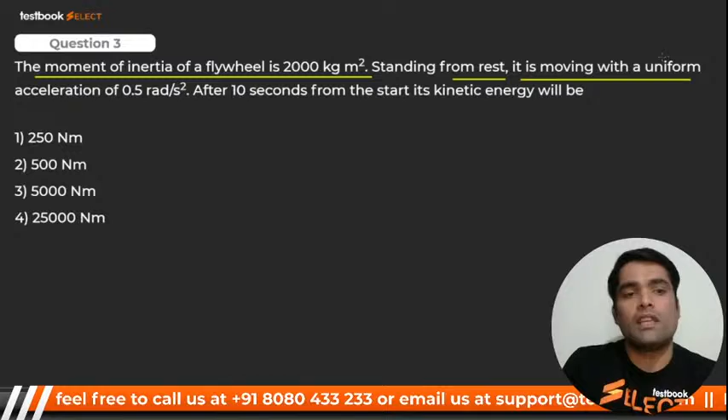The moment of inertia of flywheel is 2000 kg meter square, standing from rest, so U equals 0. It is moving with a uniform acceleration of 0.5 rad per second square after 10 seconds. From the start, its kinetic energy will be - so omega 1 will be what? Omega 1 is 0, yes it is at start, omega 1 is 0.

Omega 2 will be what? It should be omega 1 plus alpha into t. Omega 2 equals omega 1 plus alpha into t. You know omega 1 is 0. Alpha is 0.5 multiplied by 10, it should be 5. So what is kinetic energy? It should be none other than half of I omega 2 square, right? Calculate the answer, and the answer will be...

2500... 25000 Newton meter. I hope you got it. Had you got it? Very good. 25000, I repeat it's 25000. It's 25000, here we go for next.

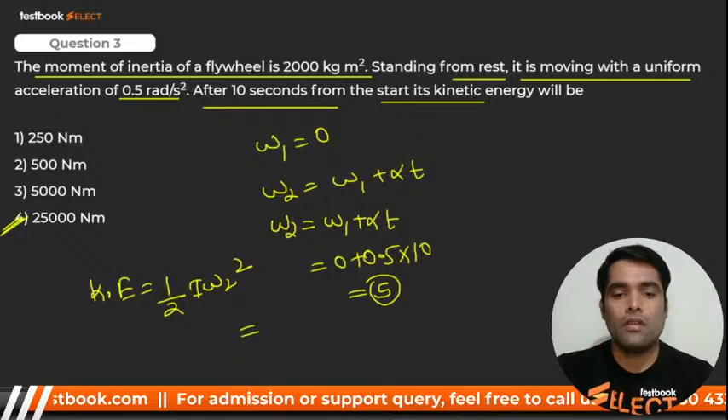This is the next question: a semi-infinite flat plate with an elliptical hole is subjected to tensile force as shown in figure. If A by B equals 2, then the stress concentration factor KT - what should be the KT? What is the formula for calculating it? Yes, it should be none other than KT equals 1 plus 2 into A by B. A by B is given, so KT will be equal to 1 plus 2 into 2, it should be 5. Very good, 5. Here we go for next.

U infinity is free stream velocity, U is velocity at Y, and delta is boundary layer thickness. Then for the boundary layer flow, the momentum thickness theta is given by - can you tell me? It is none other than integral 0 to delta of U by U infinity, in bracket 1 minus U by U infinity, so it should be none other than number 1. Very good, number one, very good.

Here we go for next. K is thermal conductivity, H is heat transfer coefficient. Then the critical radius of insulation for a cylinder is K by H, and for sphere it should be twice K by H. So it should be K by H, that is number 1. Okay, here we go for next.

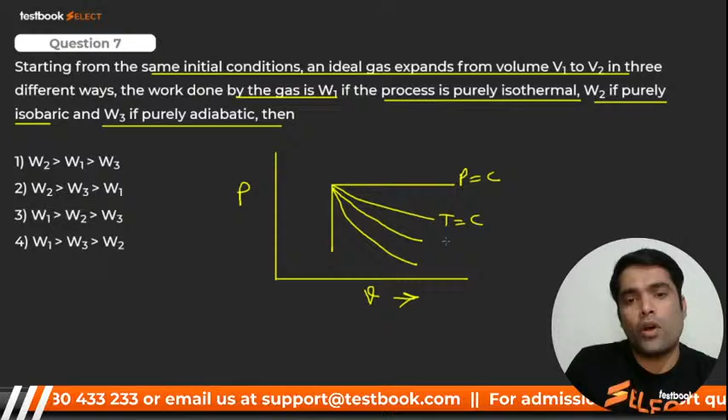The work done by the gas is W1 if the process is purely isothermal, W2 is purely isobaric, and W3 is purely adiabatic. You have seen for expansion - isothermal, polytropic, adiabatic, right? So the area under the curve which is the most, that is nothing but constant pressure, it is isothermal. And it is polytropic, and PV raised to power gamma equals C, that is adiabatic.

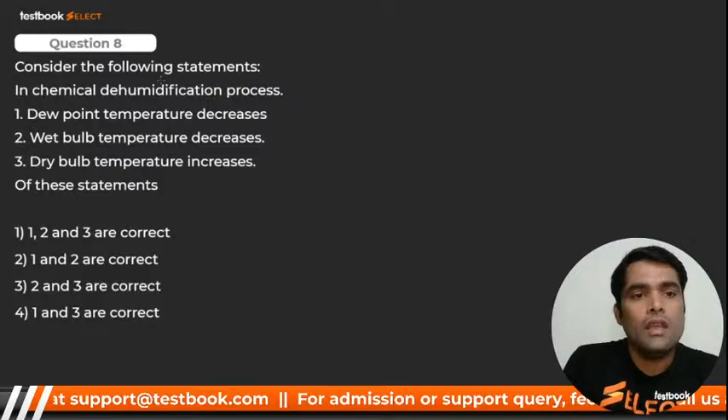Consider the following statement: in chemical dehumidification process, dew point temperature decreases; in chemical dehumidification, chemical dehumidification means this one, right? So dew point temperature is definitely decreasing, no issue. Wet bulb temperature decrease? No, wet bulb temperature remains constant. Dry bulb temperature increase, correct. So statement 3 is correct, but 2 is wrong. So definitely 1 and 3 are correct. Number 4 is correct.

Let me check your answer. Very good, 4, 1 and 3. Here we go for next.

A particle has straight line motion as per this equation. x is in meter, t is in second. After 2 seconds from start, what is the acceleration? dx by dt will be v, and the next derivative will be acceleration. So first we find dv. That means I have to find out 2 times derivative of this x. So it should be 3t squared

minus 4t, right? And next time it should be 6t minus 4, right? And after 2 seconds, so it should be 12 minus 4, that is 8.

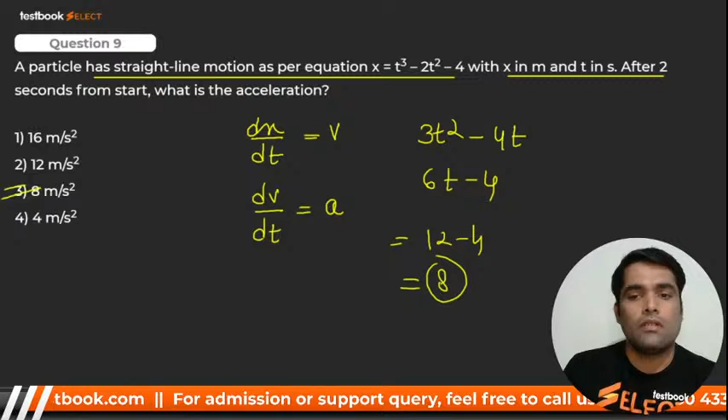8, very good, I have solved it now. Why worried? I have solved it. Okay, here we go for next.

The aim of just-in-time manufacturing is to reduce lead time, yes; improve customer satisfaction, of course; increase productivity, yes. So all of the above are correct. Very good, can we go for next?

Here we go for next. Okay, in a blanking operation.

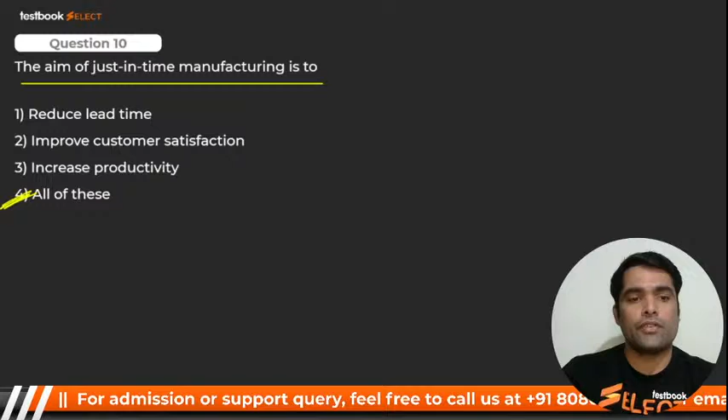In a blanking and piercing operation, clearance between die and punch depends on what? Clearance kiske beech depend karega? It depends on the sheet thickness, thickness of sheet material, right? Very good, thickness of sheet material. Very good, question number 11.

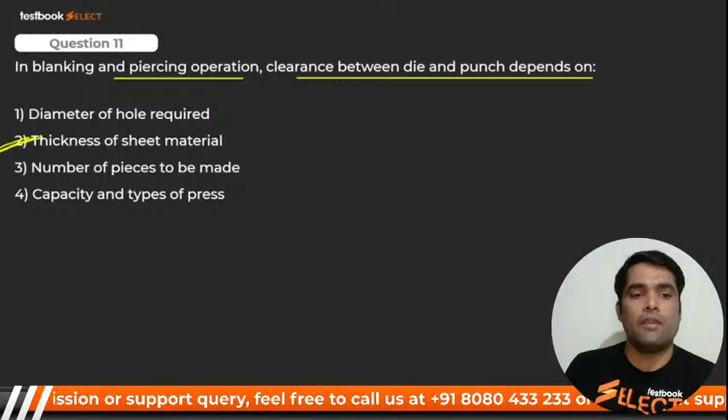Here we go for next. Sheet thickness, very good. For a helical spring, spring index is nothing but mean dia to wire dia - mean coil diameter to wire diameter, right? Number 3. It's an informative question, you should know, my dear. Perfect, mean coil dia to wire dia.

Sensitivity of governor is nothing but W range divided by W mean, yes or no? And W range will be N1 minus N2 upon N mean, right? So N1 minus N2, where it is number 1. Can we go ahead? Chalein aage. Here we go.

Question 14: which of the following bearing is preferred for oscillating condition? For oscillating purpose, we need needle roller bearing. Which one? Needle roller bearing, very good. Everybody is very good.

Oh yes, OBC, there is a chance. Education Hub signing, I have seen your query. There is a chance, yes, you will definitely. There is a good chance.

In finding Reynolds number, the characteristic length of a circular pipe of dia D is taken as, my dear, please tell me. It is none other than rho V D. Actually, D hi lenge. Kya lenge isme? D lenge. Square hai to square ki side le lenge. But my dear, if it is supposed to be

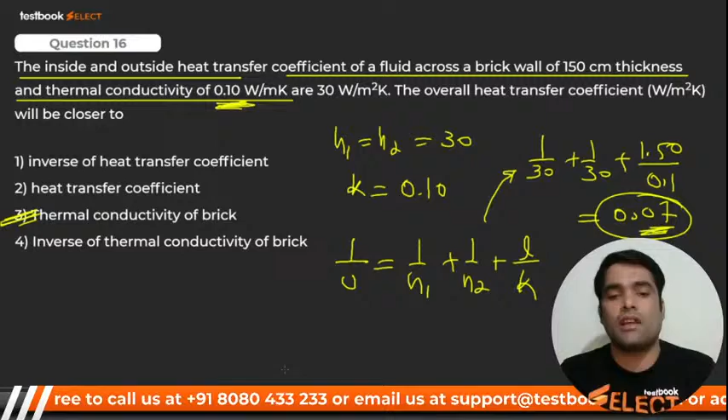0.07, and this is almost equal to the thermal conductivity, which is 0.10. So it should be approximately equal to thermal conductivity of brick. I made a mistake, I clicked inverse. It should not be inverse, sorry, that should be approximately equal to thermal conductivity. I hope it's clear. Here we go, next, I hope the diagram is visible.

The ideal gas goes from state A to state B via different processes as indicated in the PV diagram. If Q1, Q2, Q3 are different heat transfers in different paths and internal energies are given, you have to tell me the relationship between them.

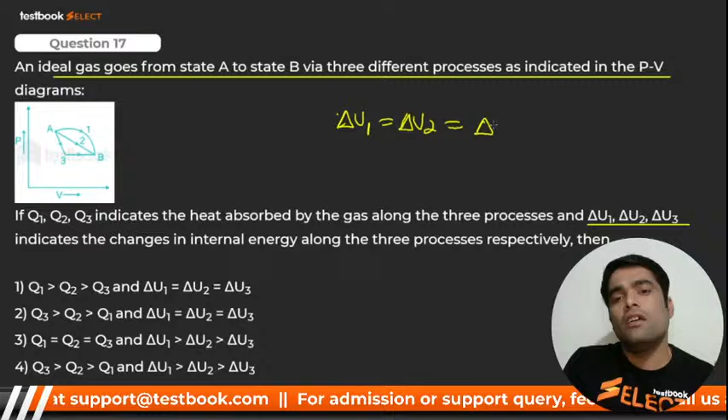The internal energy is a point function, so the change is definitely equal, since the points are the same - initial and final. So it does not depend on the path. But it is a PV diagram and the work will depend - whichever path has more work will have more heat content. So I can say W1 of path 1 will be greater than W2, which will be greater than W3. So if it is like this, then Q1 will be greater than Q2 will be greater than Q3.

Option number 1 is correct. Yes, very good, option number 1 is correct. Very good, all of you. Perfect, here we go for the next one.

The knock rating in SI engine is determined by matching the performance of the engine with a mixture of isooctane and heptane. Octane number of isooctane is 100, and heptane has an octane number of 0.

A force of 20 Newton accelerates a body from rest to a velocity of 3 meters per second; the magnitude of change in momentum in 1 second will be what? So you should know Newton's law - rate of change of momentum is directly proportional to force.

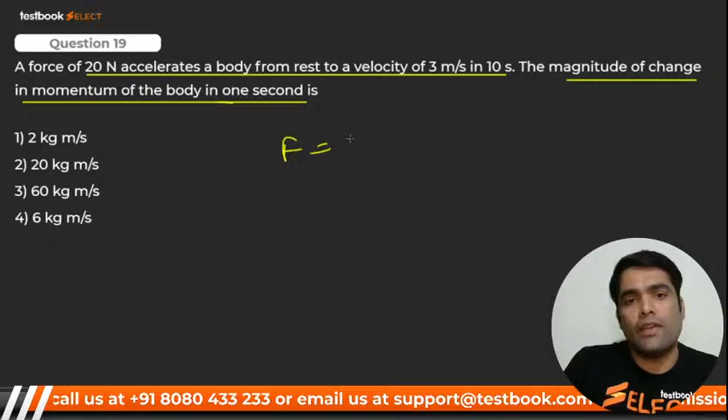Newton's second law, if you remember. So force equals change in momentum with respect to time. The magnitude of change in momentum we have to calculate, dm with respect to t, and t is 1 second, F is given as 20 Newton. So with 1 second, that will be 20 kg meter per second.

Very good, 20, very good, Avit.

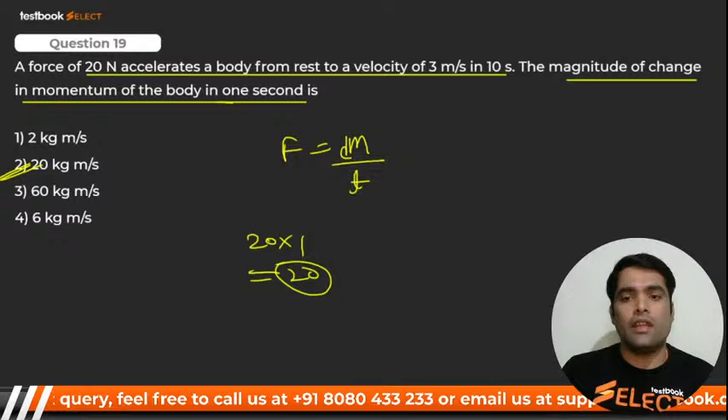At break-even point, there is no loss, there is no profit. That means total cost will be equal to sales revenue cost. Okay, I hope you got it. Yes, very good. Total cost is equal to sales revenue cost.

Here we go for next. Which one of the following welding methods provides the highest heat flux?

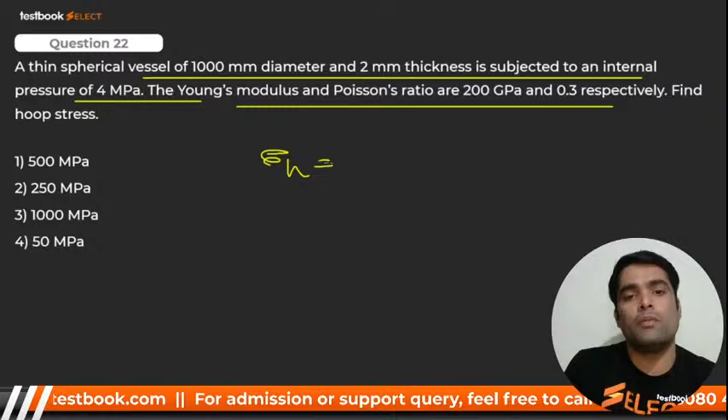Find the hoop stress. What should hoop stress be? It should be PD by 4t. Calculate it, how much is it coming to?

I think it's 500 megapascal. Is it 500? Yes or no, please tell me, guys. It is 500, very good. Everybody said 500.

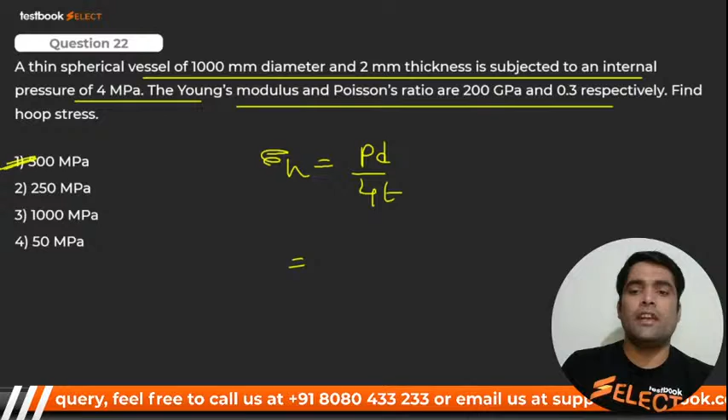500. 500. It is 500. Check it. Here we go for next.

Consider the following statement: a stub tooth has working depth large. No, what does the working depth become? It reduces. So it is incorrect.

The path of contact for an involute gear is an arc circle. No, it's a straight line. What is it? It is a straight line. Not right, so it should be neither one nor two, okay.

Very good. PD by... I hope you got it. Here we go for next.

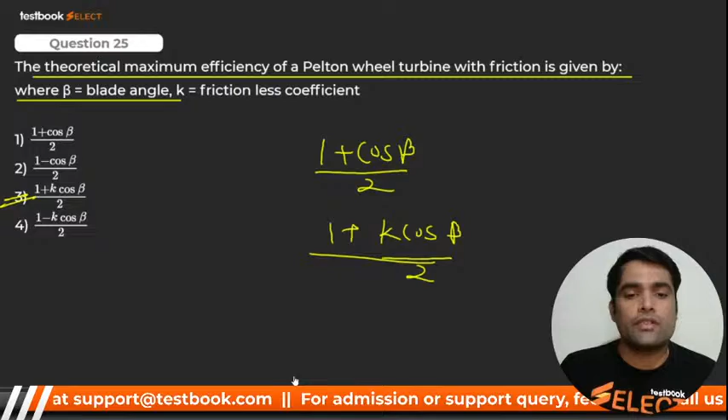Under which of the following conditions, stated with respect to internal and external resistance of a body, is lumped system analysis applicable? You should know that Biot number should be less than 0.1. Now tell me what should be the option. I have given you a hint.

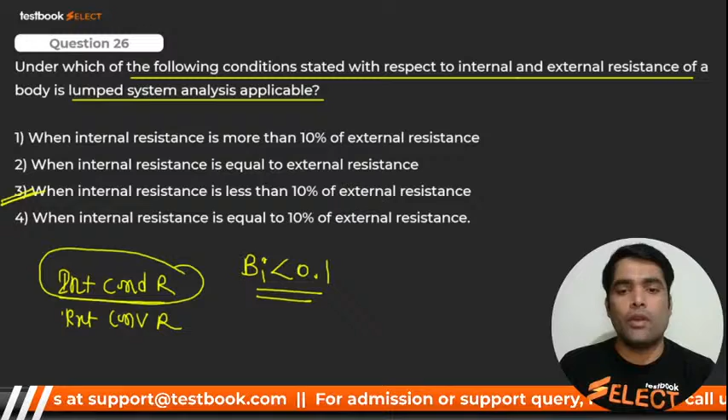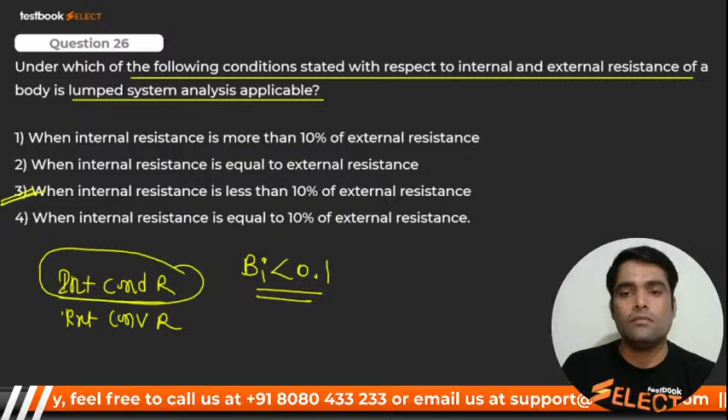Very good. Is buffering happening? Yes, is there any buffering, please tell me. Monu Kumar said there is buffering. Guys, please tell me, is there any buffering? No. I think Monu, that is an issue from your side. Okay, Ramji said buffering, no, there's a bit of buffering. Okay.

What will be the specific enthalpy of steam at pressure 2 megapascal, dryness fraction 0.9, given specific enthalpy of saturated liquid and specific enthalpy of saturated vapor at 2 megapascal? So, my dear, it should be what?

H is equal to HF plus X into Hg minus HF. Hg is this value, HF is this value. Put the values in, get the answer, with X equal to 0.9, and H will come out.

And H is how much? H is none other than 2610. How much is it, child? 2610.

Very good. I hope now it's fine. Sometimes it's a bit off. Okay, here we go, Sharmila Pali, no. Okay, here we go, my dear. See.

In a cooling application, the temperature of air entering and leaving the cooling coil. Entering at 35, and leaving at 9.5. The bypass factor value is given as 0.15.

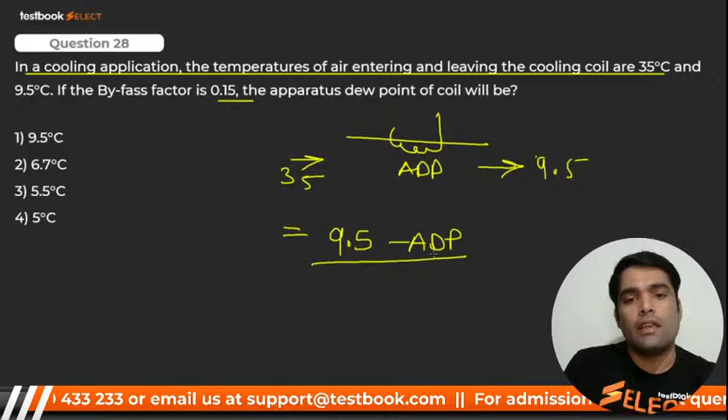35 minus ADP, and it is equal to 0.15. Calculate ADP. ADP will be 5 degrees centigrade. 5 degrees centigrade will be the correct answer.

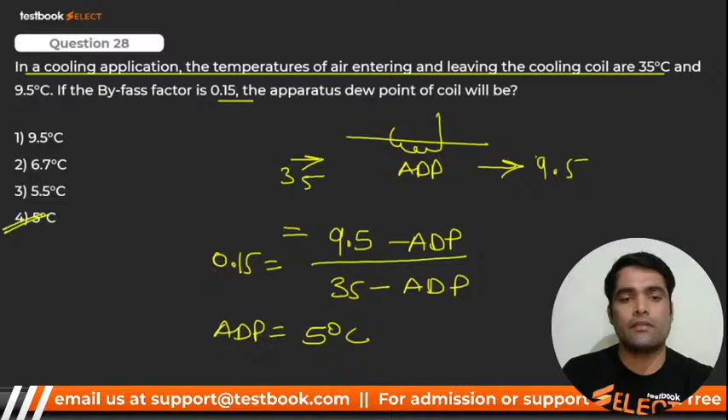Here we go for next, my dear. The range of projectile is maximum when the angle of projection... Range, what is the formula for range, my dear?

Can you tell me? It is none other than what? Range is equal to V square upon twice G into sin of 2 theta.

So when will this theta be maximum? It will be maximum when sin 2 theta becomes sin 90, because then its value becomes 1. So theta will be 45 degrees. Very good, here we go for next.

In a network, what is total float? They are asking for TF, total float, where LFT is latest finish time, EST is earliest start time, and Tij is the time of activity to complete IJ. Now tell me the formula for total float.

Total float, what will it be? Total float is nothing but latest finish time of activity J, minus earliest start time of I, minus Tij. So the fourth option should be the right answer. Very good, beautiful, dear.

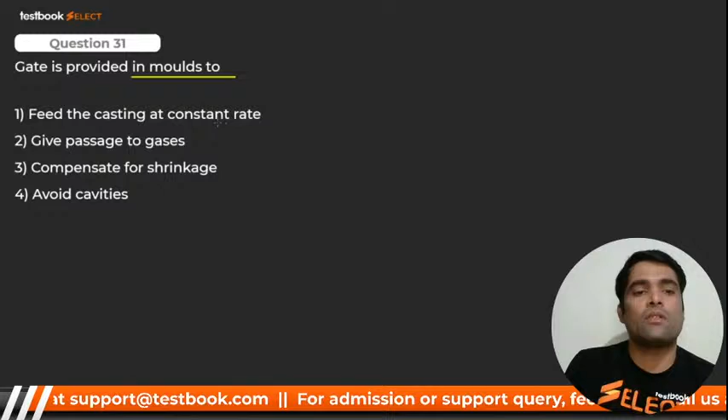Here we go for next. Gate provided in the mold ensures what, my dear? Feed the casting at a constant rate. Correct, number 1 is correct. Very good, 4 is correct. Number 1, very good.

Yes, 31, my dear, 31. 1 is correct. Total strain energy theory for failure of material at elastic limit is also known as what, my dear? It is also known as Haig's theory.

Okay, I hope you got it. Yes, are things clear? Okay, here we go, let's move ahead.

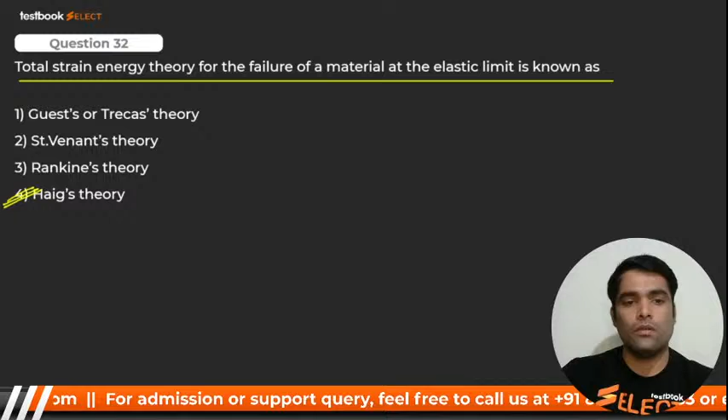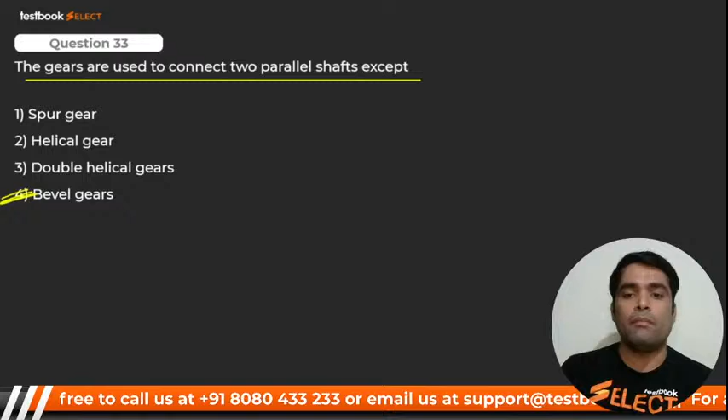The gears are used to connect two parallel shafts except, meaning which one does not connect two parallel shafts? Spur connects parallel, helical also does, double helical gear also does. The only thing, bevel connects at 90 degrees, perpendicular. So it should be the right answer, fourth one. 33, bevel, very good, bevel is correct.

Here we go for the next point. The device which permits the connection and disconnection of shaft, what will it be, my dear? Clutch, correct answer.

Oil of specific gravity given this much, what will be the viscosity in Newton second per meter square? They are asking about mu, that is dynamic viscosity.

So for dynamic viscosity, first convert this into meter square per second, which will be 0.28 into 10 raised to power minus 4. And density should be 900 kg per meter cube. You know that nu is equal to mu by rho.

So mu is equal to nu into rho. Put the value and get the answer. Nu is this much, and rho is 900. Let me know the answer, please. What is it coming to, my dear?

Answer is how much? It is 0.0252, Newton second per meter square. Is it clear? Very good. No, it's not 0.262, it is 0.0252.

Very good, Sumit, very good. Here we go for next, my dear.

The steady state heat conduction equation in radial direction in spherical coordinates, in absence of any heat sources, is given by. We saw this in the morning, the same thing we saw in the UPPSC session.

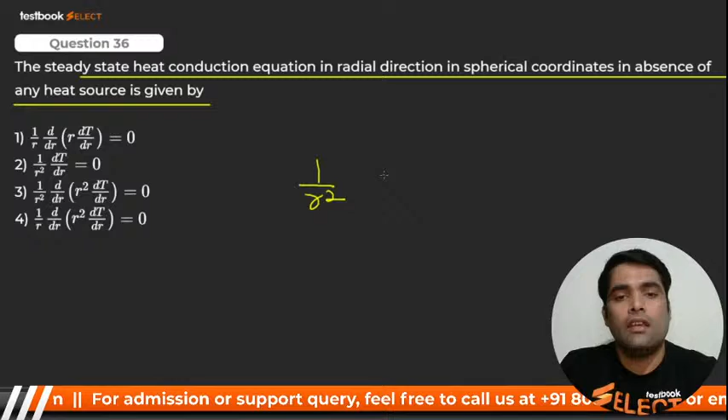It is none other than 1 upon r square into d by dr of r square dt by dr is equal to 0, and that is none other than number 3. Very good, option 3 is correct. Very good everybody, here we go for next.

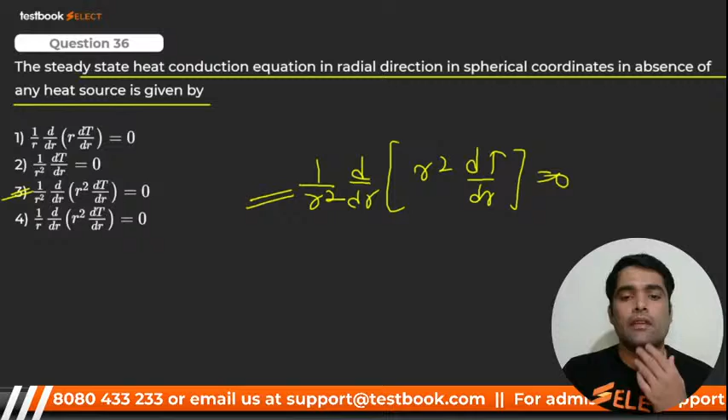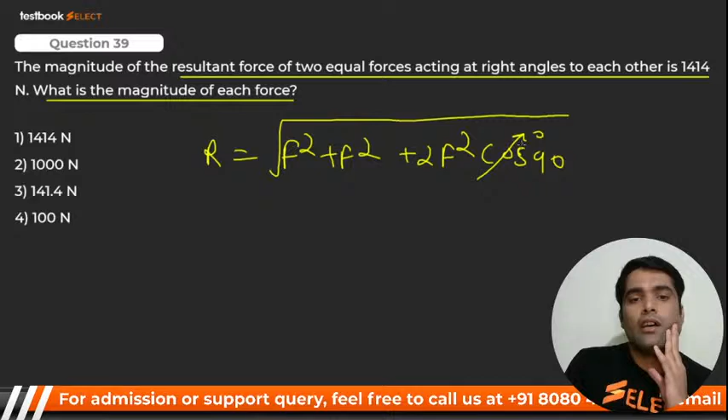So what we have? R equals 1414, which is equal to twice F square, so under root 2 into F. So F will be 1414 divided by root 2. Tell me the answer for it. The answer will be 1000 Newton.

How much is the answer coming? Tell me the answer for it. 1000. Okay, question 38, let me explain, I'll tell you.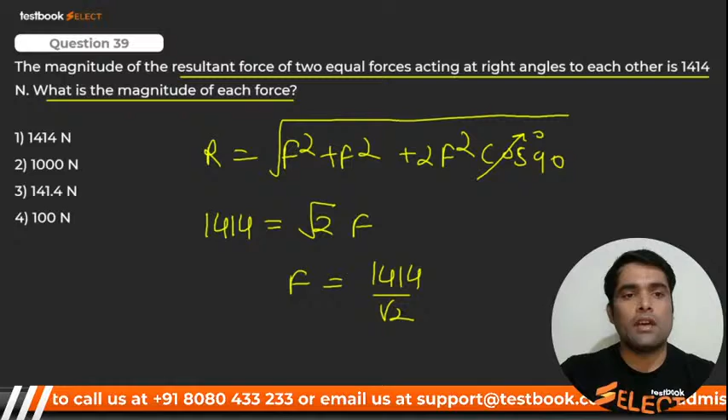1000. See, question 38: when you heat the air in a closed chamber, at that time the humidity ratio remains constant, that is omega remains constant. If omega remains constant, you know that omega and dew point lines are parallel, or they sometimes coincide. So definitely the dew point will not increase, it will remain constant. It's finished.

And my dear, relative humidity decreases. You know that when relative humidity decreases, it means it should be less than 100. If it is less than 100, that means it is unsaturated. And if it is unsaturated, then dry bulb temperature is greater than wet bulb temperature and dew point temperature. So as it decreases, the difference between wet bulb depression, wet bulb temperature, and dew point temperature will increase. So definitely the difference is going to increase between these two. Right? I hope you got it.

Spray humidification process: enthalpy of air will increase? No, it's not possible. It's humidification. I hope you got it, beta. It says decrease, but actually it is going to increase.

It will increase. Have you seen the chart, the psychrometric chart? Humidification means this: enthalpy lines are like this. So here it is, and now over here the process will move. It will be moved from point 1 to point 2. So here the enthalpy will be higher, and here it will be lower. I hope you got it. It's finished, here we go.

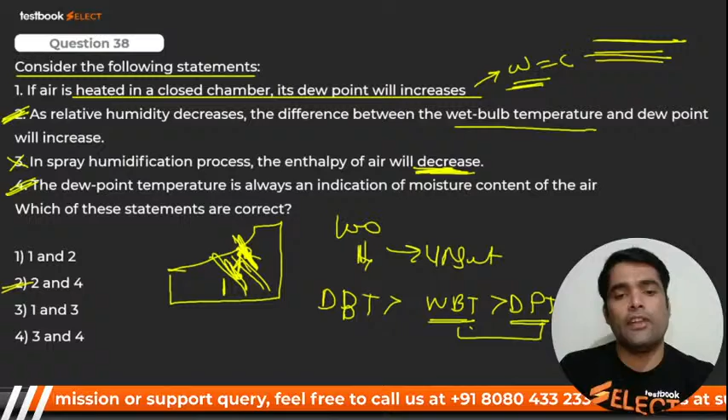Most welcome. NLC cutoff please: 85 to 95. The magnitude of, okay, we have done this one.

Process layout is employed for, my dear. Please tell me the answer of this question. We have done this now, question 39. Let me check, 39 done, 40. Guys, please tell me: the process layout is employed for batch production. Very good, batch production.

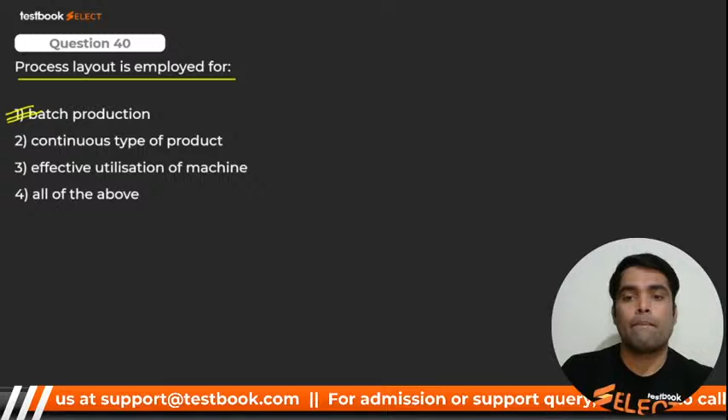It's not for. It's not for. No, no, no.

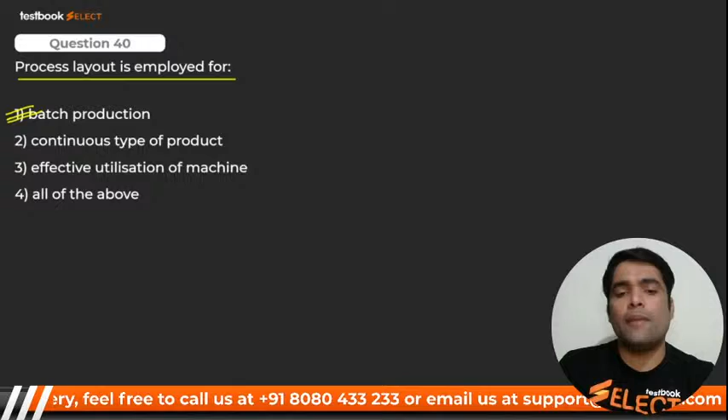Continuous type of product, continuous point of product - you are getting this in product layout. Three won't happen, that's why I said. And second will not happen. Continuous type of product you are getting in product layout.

For a hollow shaft of inner dia small d, outer dia capital D, the modulus of rupture - modulus of rupture means maximum shear stress, tau. And for solid shaft it is 16T upon pi D cube. So for hollow, what will it be? 16T divided by pi into D cube, and it should be multiplied by 1 minus K raised to power 4. So D cube shouldn't remain, it should be kept in D4 form.

So what it should be? 16T into D divided by pi into D4 minus d4. That should be the final answer. So which option is correct? It is none other than number 2: 16TD upon pi D4. Option number 2 is correct. Very good, here we go for next.

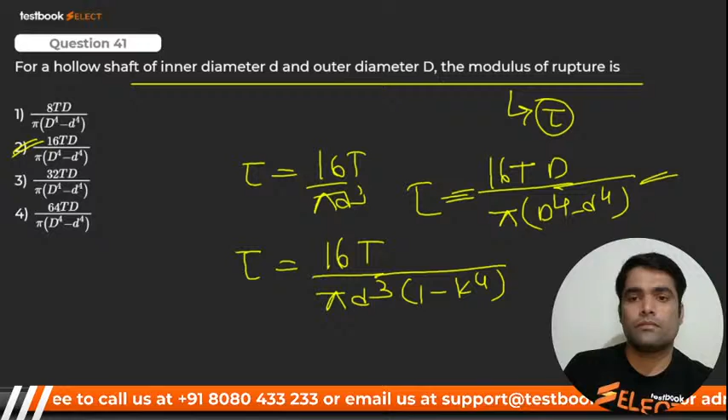For application involving transmission in one direction only, the type of thread best suited is - which kind of thread is it? It is for one direction. That is none other than - we discussed this yesterday too - that is buttress thread. Very good, buttress.

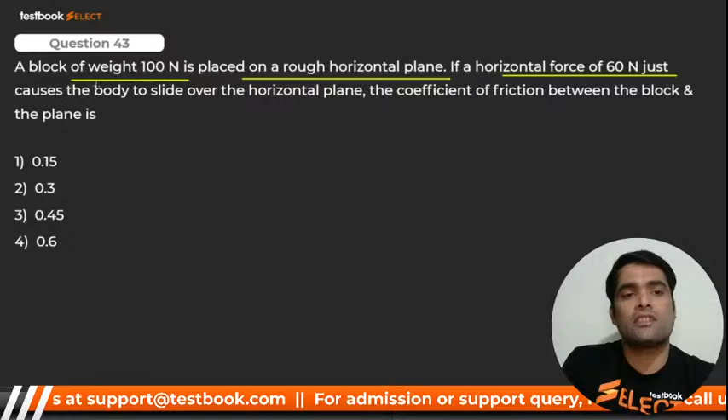The block of weight 100 Newton is placed on a rough surface. If a horizontal force of 60 Newton is just causing the body to slide over a horizontal plane, the coefficient of friction between the block and plane is - block weight is 100 Newton, so F is equal to Mu into N. Normal reaction is equal to 100 Newton, Mu you have to determine. That is F by N, that is 60 by 100, that is 0.6.

Very good, 0.6. Here we go for next. SI unit of gravitational constant. You know that force is directly proportional to product of mass and inversely proportional to distance between them, that is radius. It is like this - does it remind you of something? We've read this law in 10th, 12th, in 11th 12th, right now.

So G will be what? It should be F R square upon M1 into M2. F will have units, and R will be meter square. So M will be kg square. So what it should be? Newton meter square per kg square. That is option number 1. I hope you got it, beta.

Let's move ahead. I hope you got it. Very good, answer is 1, here we go.

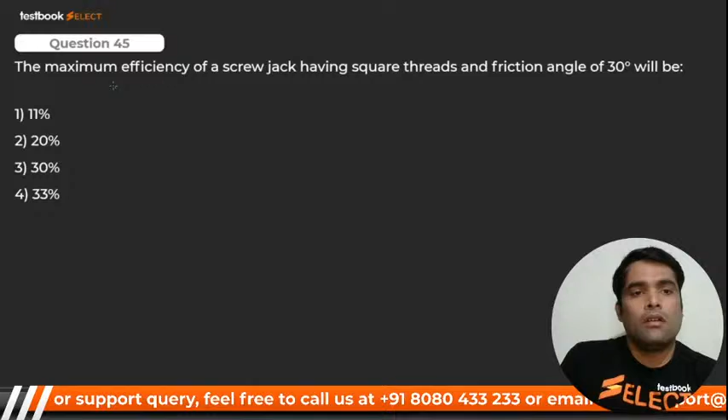The maximum efficiency of screw jack is 1 minus sine theta divided by 1 plus sine theta. Does it remind you - 1 minus sine of 30, 1 plus sine of 30? And sine 30 is 1 by 2, calculate the answer and let me know. 1 minus 1 by 2 sine 30, that is none other than - above it becomes half, and below it becomes 1 plus 1 by 2, that is 3 by 2. So half divided by 3 by 2 is 1 by 3, and 1 by 3 means 0.33, that is nothing but 33%.

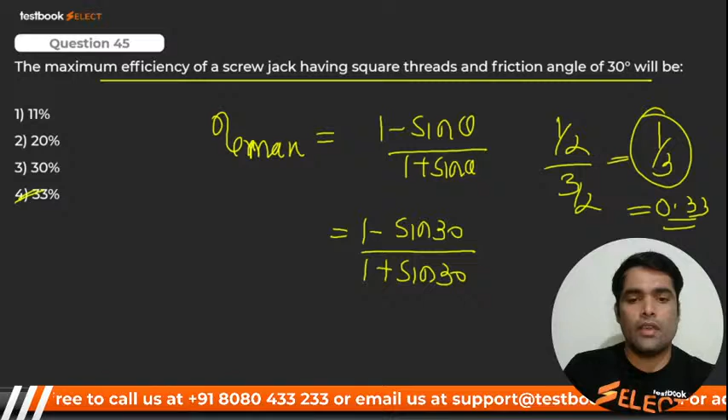A circular disc has masses in ratio 1:2, radii ratio 2:1, find the ratio of their moment of inertia. For circular disc, moment of inertia is mr square by 4. So I1 by I2 will be directly proportional to mass and radius squared - that is M1 by M2 into R1 by R2 squared. M1 by M2 is 1 by 2, multiplied by R1 by R2 squared which is 4 by 1, so that becomes 2. Answer will be 2:1.

Here we go for next. Very good, 2:1, very good.

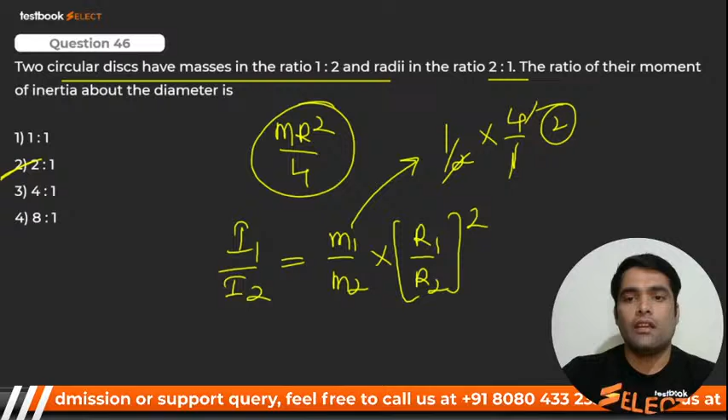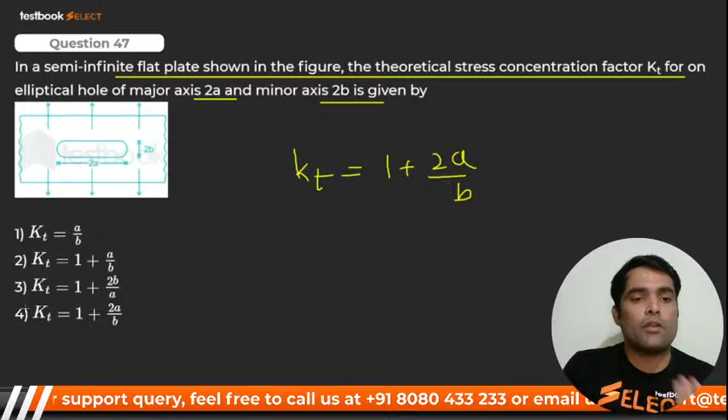A semi-infinite flat plate is shown in the figure. The theoretical stress concentration factor Kt for an elliptical hole of major axis 2a and minor axis 2b is given by 1 plus twice a over b. That is the stress concentration factor we already calculated. The answer is option 4.

For a floating body, the buoyant force passes through the centroid of the volume of liquid which has been displaced. The answer is option 4. Correct, everybody.

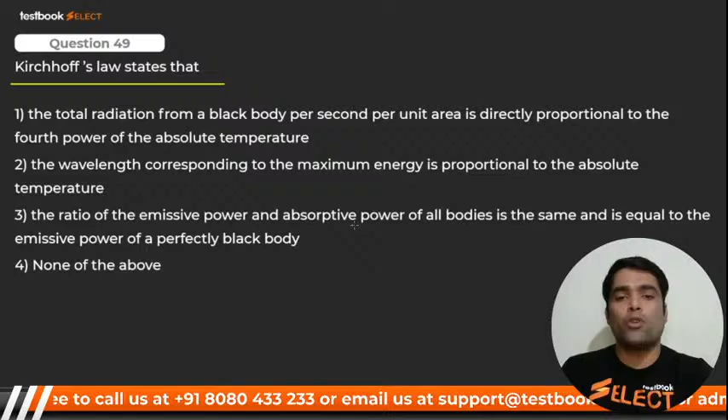Kirchhoff's law states that the ratio of emissive power to the absorptive power of all bodies, in the same condition, is equal to the emissive power of the perfectly black body. The answer is number three.

Centroid of displaced volume is correct - that was the answer to the last question.

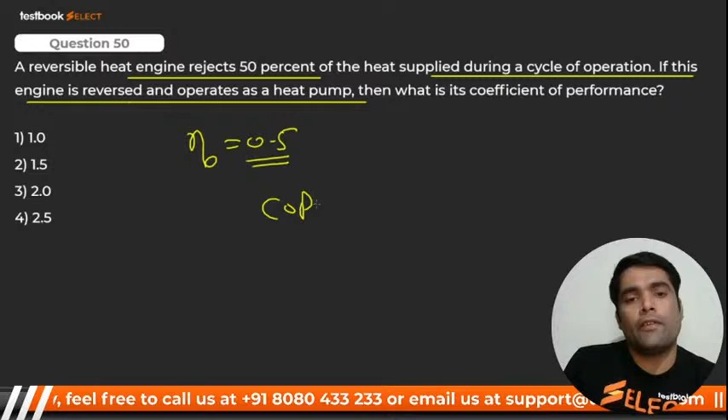A reversible heat engine rejects 50% of heat. If 50% is rejected, that means 50% is converted into work, so efficiency is 50%. Now if the engine is reversed to work as a heat pump, you know that 1 plus COP of refrigerator equals 1 upon efficiency of heat engine. So 1 upon 0.5 will be 2.

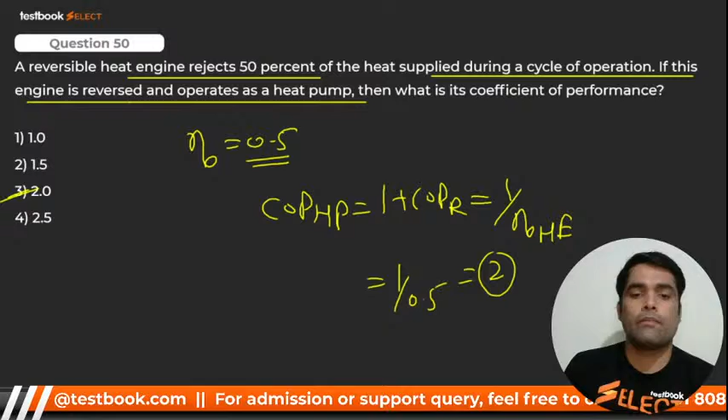Consider the following statements: excessive power consumption, high compression, large volume rate. In case of a vapor compression machine, if the condensing temperature of refrigerant is closer to the critical temperature, there will be excessive power consumption, high compression since temperature increases, and large volume rate. So all are correct - 1, 2, 3 are correct.

Question 51. What should be the answer for it? Please tell me fast. The answer is option 1.

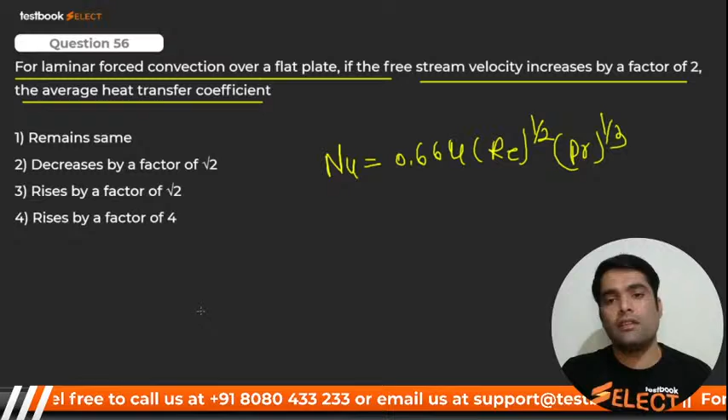You know there is a Nusselt number for forced convection, that is 0.664 Reynolds number raised to power 1 by 2 into Prandtl number raised to power 1 by 3. You know Nu means HD by K, right? And Reynolds number means rho V d by mu, right? So V raised to power 1 by 2 means square root. So can I say H is raised to power 1 by 2? So you have to tell me H is directly proportional to the square root of V.

Yes or no, yes or no? Yes, of course. So which option is correct, my dear? Here option number 3 is correct. Which one? 3. Which one is correct, the third one, rises by root 2. Got it? Very good. Rises by root 2, very good.

Here we go for next question, 57, sorry. Consider two containers A and B containing identical gases at the same pressure, volume and temperature. The gas in container A is compressed to half, to half of its original volume, isothermally, while the gas in container B is compressed to half of its original volume adiabatically. We have to calculate the ratio of final pressure of the gas in B to that of A. How can we calculate that, my dear?

You should know that. First let's deal with A. For A, P1V1 is equal to P2V2, that is PV. P1V1 was PV, and P2 into V by 2 should equal PV, so P2 is nothing but twice P, 2P, right? Yes or no, got this? This is the pressure of A only, okay? Got it?

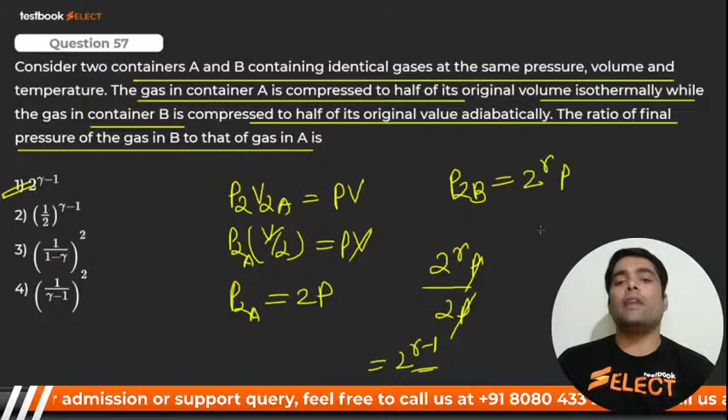Now they have asked the ratio of B to A, right? So it should be 2 into 2 raised to power gamma into P divided by 2P. So P and P get cancelled, my dear. You will get 2 raised to power gamma minus 1, because the power should go up minus 1, right? So the answer is option 1. Got it now? Very good. I have done it directly for B because it's an adiabatic process.

Just you have to put the gamma extra thing. Okay, here we go for next.

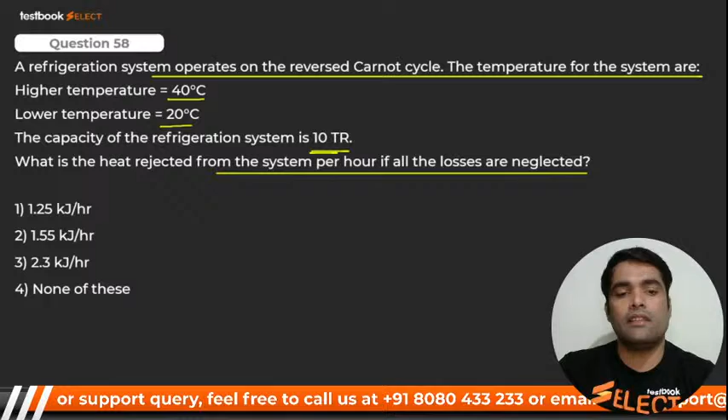A refrigeration system operates on reverse Carnot cycle. The temperatures for the cycle are given, higher and lower. The capacity of refrigeration is 10 TR. What is the heat rejected from the system per hour if all losses are neglected? Guys, we have to calculate the heat rejected. What we have to calculate? Heat rejected.

So my dear, it's a reversible cycle. So the lower temperature should be 293, that is 273 plus 20, right? And here, what is the difference between both temperatures? That is 20, right? So what should it be? COP. This is what, my dear? COP is lower temperature divided by TH minus TL. So it should be 14.65.

How much did it come to? 14.65. Now, if you have COP, my dear, you can calculate, right now, yes or no? Of course you can.

So my dear, just see here. Now see, 14.65 is equal to refrigeration effect, and that is what? 10 TR, right? So 10 multiplied by what, my dear? They want it in kilojoule per hour. So how will you do this?

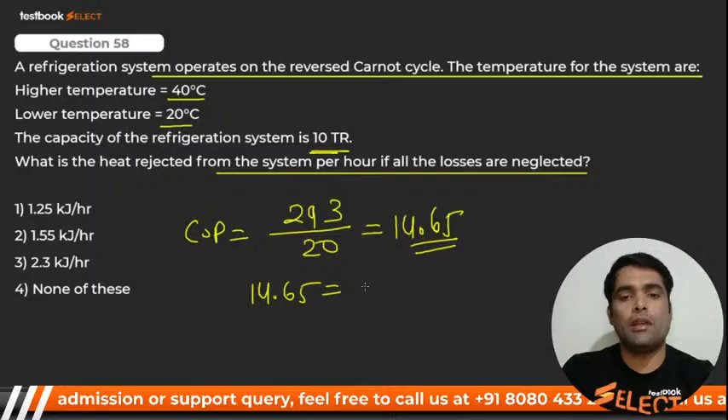So we'll do one thing. We'll let it remain like this, right? We'll calculate it in TR, right? So it is 14.65 multiplied by, equals 10 TR divided by W. So my dear, W will be what? W will be 10 TR divided by 14.65, right? Yes or no? Now you will get W from here, and W will be 0.682. How much did it come to? 0.682, right?

And you know heat rejected will be what, my dear? 0.682 plus 10. Hey, what will heat rejected be? 0.682 plus 10, right now? Yes or no? The work added, right? Because the heat rejected in refrigeration is what? It is RE plus W, right? So that's the same thing I have done. That is 10.68. But my dear, it is in TR.

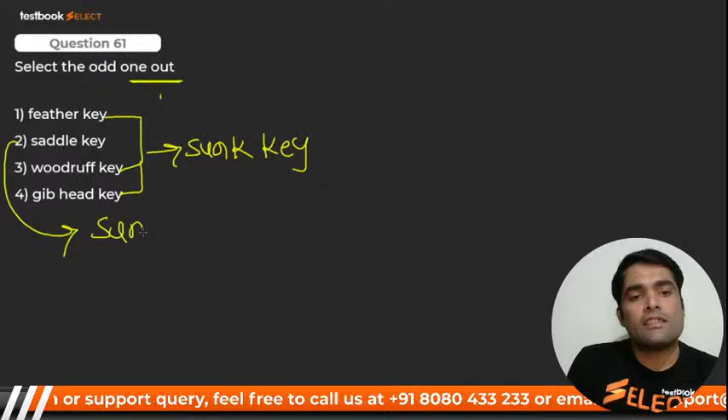Sunk into hub, my handwriting isn't very good, sorry for that. That is number 2. Wait, number 2 is correct. Saddle key, very good.

The stream function, psi, is given by x cube minus y cube, for a two-dimensional flow field at point 1, minus 1. So you have to calculate the component first, right? First of all, you have to calculate u and then v, right?

So you know u is equal to minus of d psi by dy. So minus d psi by dy, it is minus of minus, that is thrice y square. At minus 1, that is 3 into minus 1 square, that is 3. What is v, my dear?

v is d psi by dx. It should be none other than thrice x square, that is 3. So 3 and 3, right? Under root, square of both these values. That is 3 square plus 3 square, that is 9 plus 9, 18. What answer will come? The square root of 18, that is 4.24.

Very good, 4.24. Here we go for next.

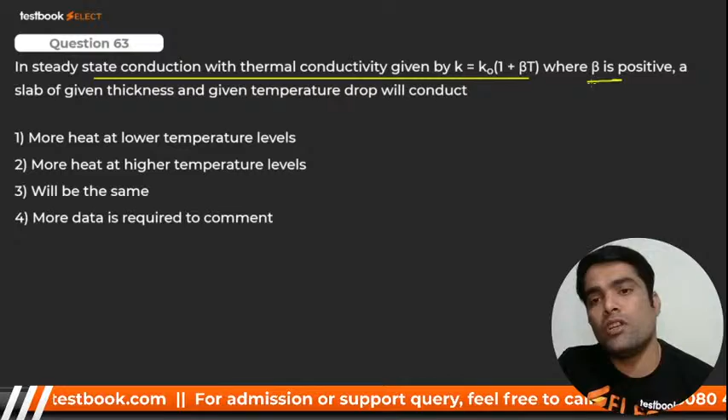In a steady state conduction with thermal conductivity given by this one, yesterday we did the negative case, today here it is positive, so definitely this time the temperature will be higher. Same option, right? We have done this question yesterday also, but at that time it should not be. Yes, it should be more heat at higher temperature. Very good.

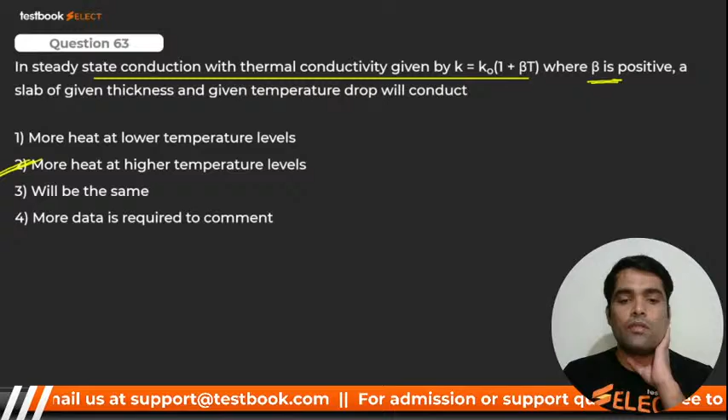A small steam vessel, perfectly insulated and doing no shaft work, causes enthalpy drop of 1.25 kilojoule per kg. The kinetic energy of steam at entry is negligible. We have to calculate the velocity of steam.

So it is a vessel. There is a vessel, so definitely the vessel will work like what, my dear? It should be working like a nozzle. So it works like a nozzle. It is 2 into 1000 into delta H. Delta H should be in kilojoule per kg, then it should be in meter per second. So, 2000.

Where does this equation come from? This equation is nothing but the steady flow energy equation applied for a nozzle. If you remember, delta H is 1.25. Let me know the answer. Please tell me the answer for it. It is none other than 50 meter per second.

Question 65: Air cooling is used for Freon compressors, whereas water jacketing is adopted for cooling ammonia compressors. This is because why? It is just because of high discharge temperature than Freon. The discharge temperature from compressor in ammonia is quite high, my dear. Number 4, very good. 65, fourth one is correct.

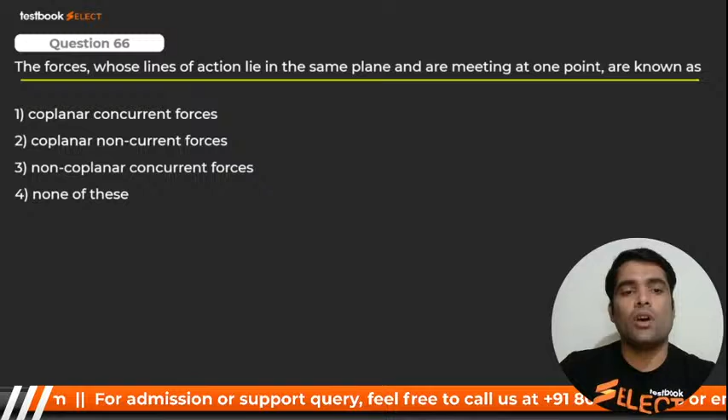Here we go for next. The forces whose lines of action lie in the same plane and are meeting at one point are known as what? If they are in the same plane and meeting at one point, it is none other than coplanar concurrent forces. Very good, it is coplanar concurrent.

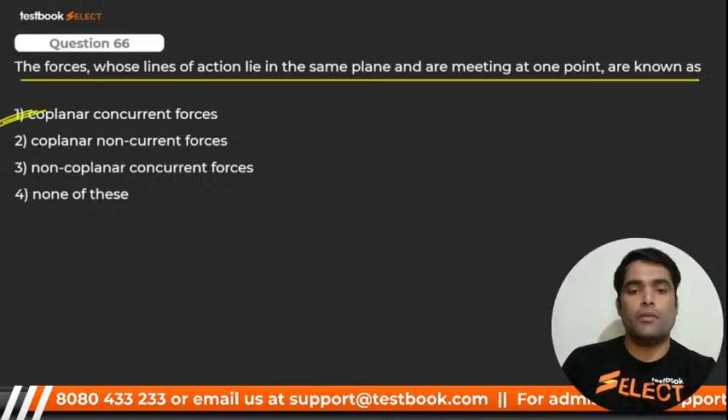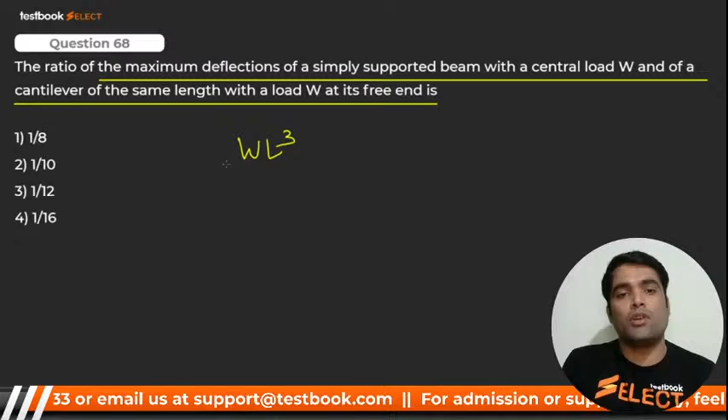The ratio of maximum deflection of a simply supported beam with a central load of W, and of a cantilever beam of same length with load W at the free end. You should know what the deflection ratio for a simply supported beam is. It is WL cube upon 48 EI for simply supported beam, whereas for cantilever beam it is WL cube upon thrice EI, right?

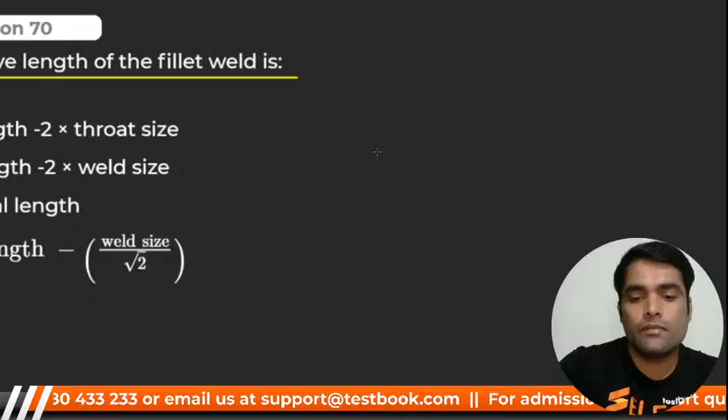Question 70: The effective length of fillet weld. What is effective length, my dear? Wait, sorry. Effective length of fillet weld is none other than 1 minus or 1 plus... it is 1 minus into size of weld. 1 minus into total length minus this one, that is L, not 1, sorry. L minus 2 into weld size, that is S.

Very good, here we go. It's not throat size, it's weld size. Remember, it is weld size.

Okay, here we go for next point. The frictional resistance of a pipe varies. Frictional resistance HF is equal to FL V square upon twice G into D.

This is the characteristic length, that is m equal to A by P, remember? We did this before. So approximately it varies with the square of velocity.

Heat is lost from a 100 mm diameter steam pipe placed horizontally in ambient air at 30 degree centigrade temperature. Nusselt number is given as 25, and the thermal conductivity is given. Then find the heat transfer coefficient.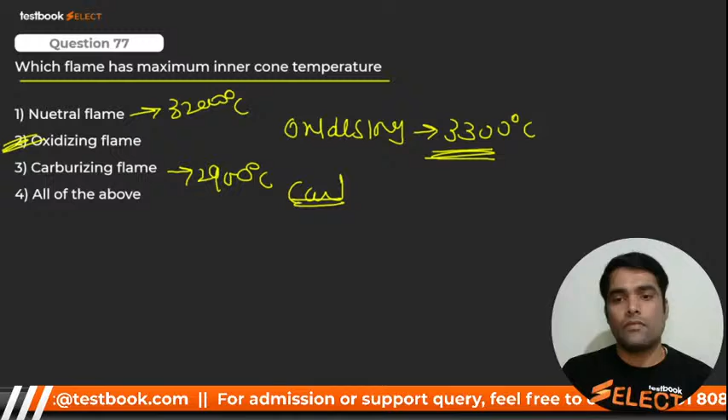Very good, here we go for next. Maximum shear stress theory for failure of material at the elastic limit is known as Guest or Tresca theory.

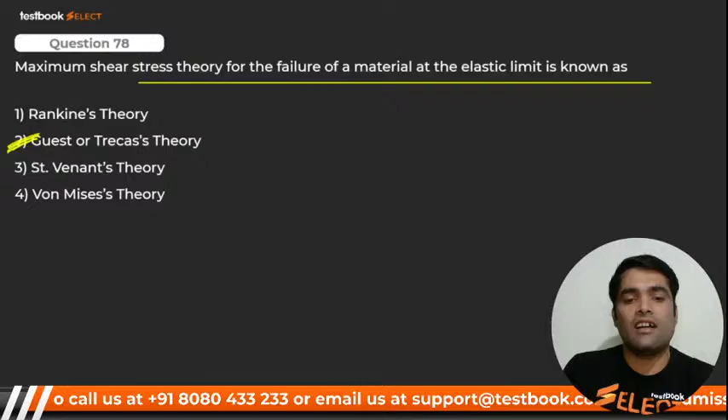A point B on rigid link AB moves with respect to point A with angular velocity omega. What is the acceleration of point B with respect to A? Since AB is moving with respect to point A, we have to calculate the total acceleration of B with respect to A. There is definitely a radial component and a tangential component. Coriolis component only comes in when there is sliding, and here there is no sliding. So it should be radial component and tangential component, which is option number 3. Very good, I hope you got it.

Here we go for next. Pre-tensioning of the bolted joint is used to increase the stiffness of the bolted joint, which is option number 3. Sliding has Coriolis component. Very good, Sumit. Third is correct, here we go for next.

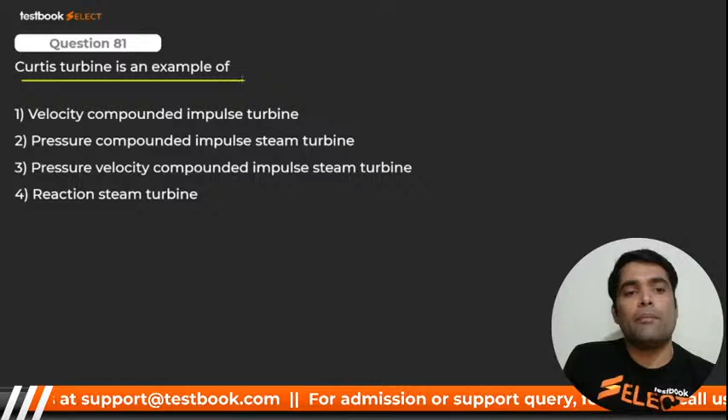Curtis turbine is an example of velocity compounding impulse turbine.

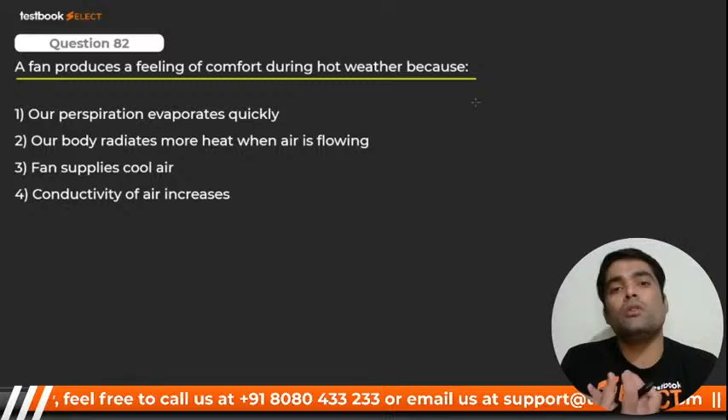A fan produces a feeling of comfort during hot weather because whatever sweat you have gets evaporated quickly - perspiration has been evaporated quickly. That's the answer, number one, it's a basic question.

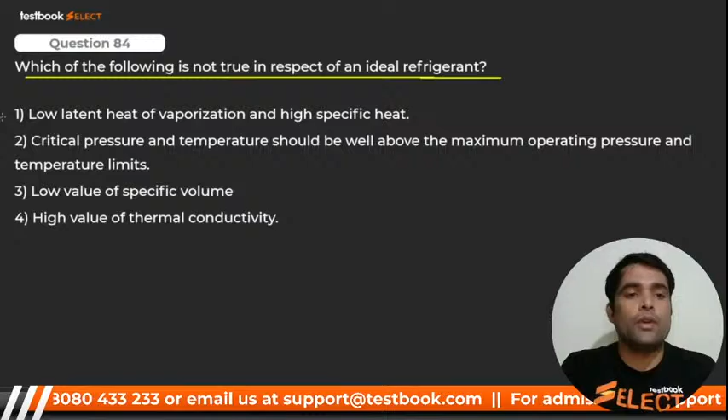Which of the following is not true in respect of ideal refrigerant? Low latent heat of vaporization - no, latent heat should be high, my dear, so this is incorrect. So number 1 is our option, right?

The maximum value of Z, thrice x1 plus x2, is subjected to constraint. Okay, I think we have to draw. So what you have to do? Thrice x1 plus x2. So my dear, if you put x2 equal to 0, then what will you have? x1 will be, I'll get coordinates, that is 3 by 2.

That is what, my dear? I will say 1.5 and 0. Another point is what? I'll put x1 equal to 0, I'll get 0, 3. And this one, I'll get point 0 and 0. That means 0, 0 means the line will pass from the origin, one line.

Right? And it is greater. So, my dear, the direction - which side will the direction be? Direction will be in this side, my dear. It is greater. Okay.

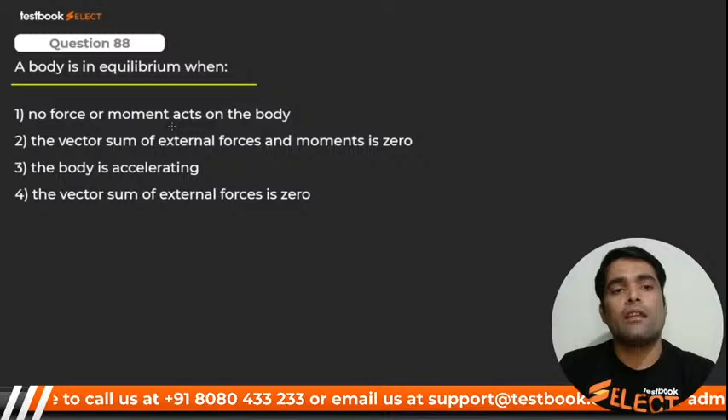A body is in equilibrium when the vector sum of external force and moment is 0, right?

Francis turbine running at 200 RPM develops power this much, with head 25. The power output under head of 100 meter will be - it is model and prototype, right? Yes or no, beta? Yeah, of course it is. So now you have to tell me the answer for it.

Guys, please tell me how it could be. Yes, please tell me, my dear. It is none other than P upon D5 n cube. Right now, what does it become? P upon D5 n cube.

Just solve this. Turbine develops power, so allowed dia is same. Under head, what we have to calculate? Output under head. N is given as 200 RPM, 5000 kilowatt. Head is 25 meter. Then power output under a head.

Now from here, P1 is given, P2 is given. No, P2 is not given. We have to use another formula.

From here, before that you have to calculate head. You know that H1 upon H2 is nothing but N1 upon N2 whole square. From here you will get H2.

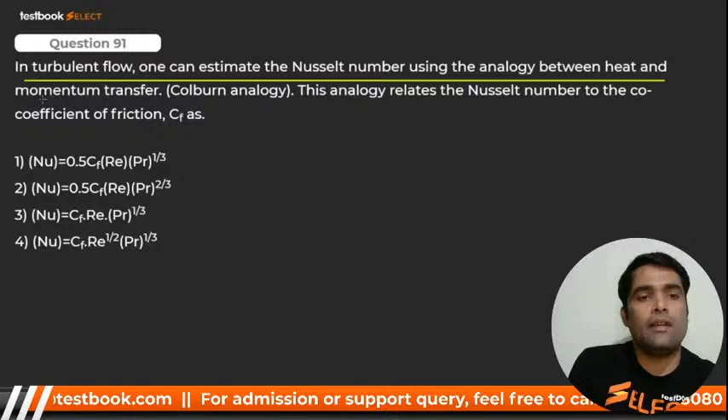91. In a turbulent flow, one can estimate the Nusselt number using the analogy between heat and momentum transfer, that is Colburn analogy. The analogy relates the Nusselt number to the coefficient of friction CF. Which one is correct? It is none other than number 1, that is 0.5: Nu is equal to CF by 2, Re into Pr raised to power 1 by 3.

Hyperbolic process is governed by PV equal to C. That means pressure is inversely proportional to V when temperature is constant. That is none other than Boyle's law. Which one? Boyle's law. Very good, it is Boyle's law. Here we go for next.

In a reaction turbine, the heat drop is fixed in a fixed blade. Total heat drop is 20, fixed is 8, so moving will be 12. Degree of reaction is nothing but enthalpy drop in moving blade, that is 12 divided by 20. So it should be 0.6, that is 60%. Yes, 60%. Here we go for next point.

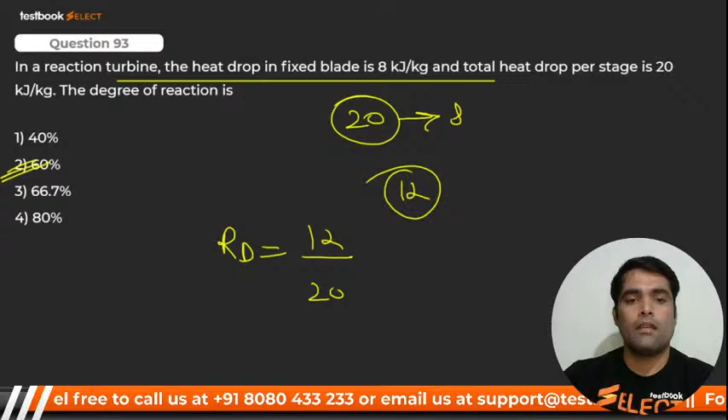Can I go ahead? Yes. Can I go ahead? Here we see.

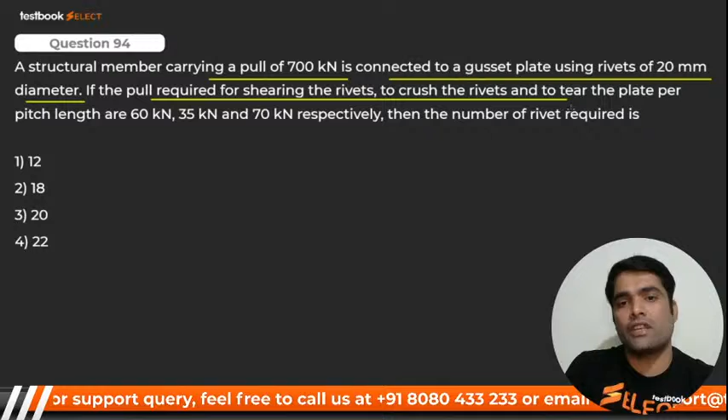Structural member carrying a pull load of 700 kilonewton is connected to a gusset plate using 20 mm dia rivets. If the pull required for shearing rivets, to crush the rivets, and to tear the plate per pitch length are 60, 35, 70 kilonewton respectively, then find the number of rivets required. How many rivets do we require? Yes, that has been asked in the question.

Can you tell me, number of rivets required is nothing but, we'll divide by the minimum value. The minimum is 35. So that is 700 divided by 35, which should be 20. Very good, that is 20. Here we go for next.

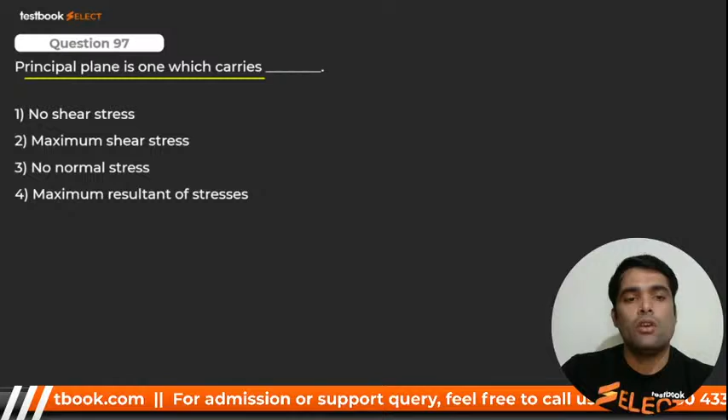Very good, Ramji. Here we go for next: Principal plane is one which carries no shear stress - zero shear. Very good, dear. Here we go for next.